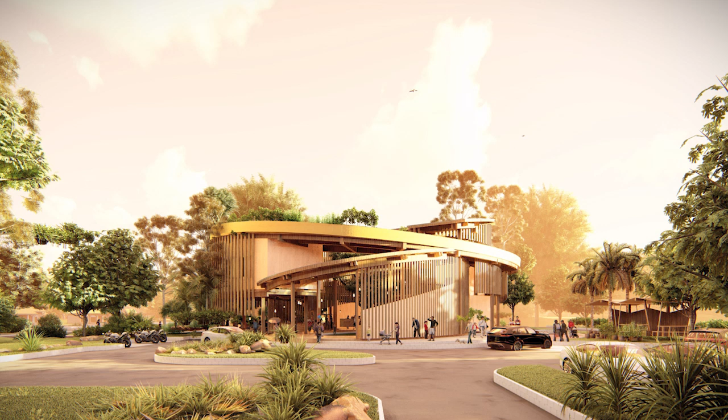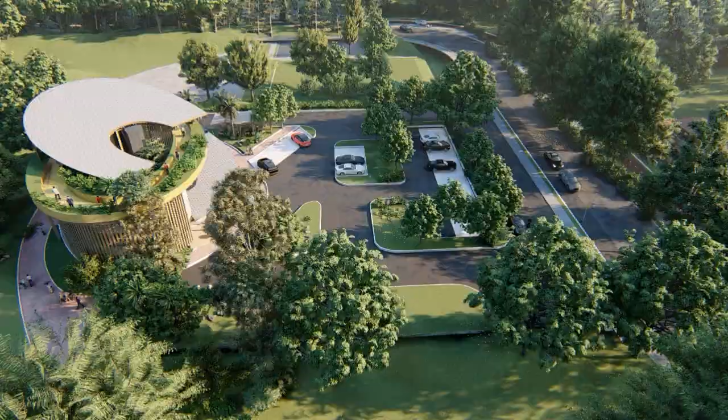Hi, I'm Wenxuan, and I'm going to start my final presentation, year 2 semester 1, with the topic of designing a food park, Loop of Hope. Loop of Hope is a food park refreshing the space with the concept of revitalization. The food park is aimed to bring in a new life and vitality to the community of Taman Pulai Jaya.

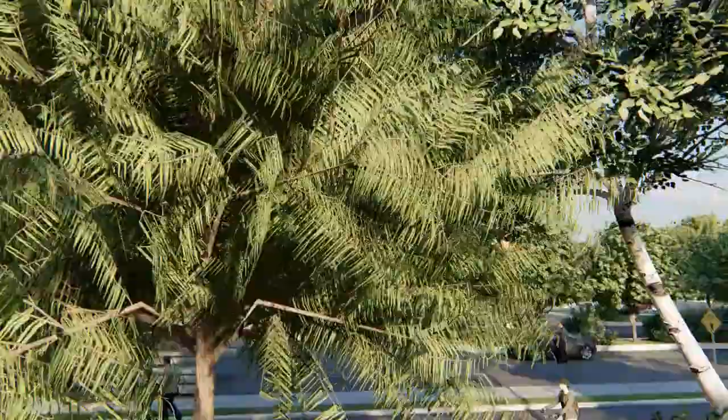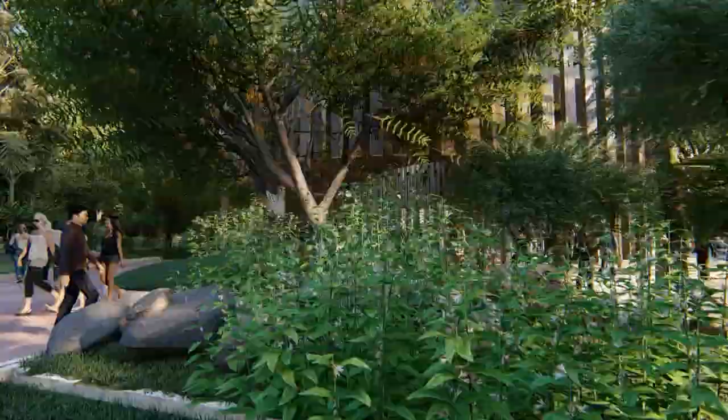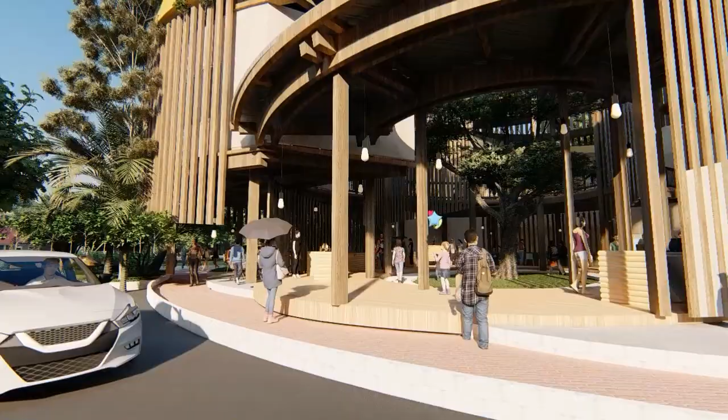We want to celebrate the essence of our cultural diversity and at the same time rethink sustainability for the future. Malaysia is indeed known around the world for its multi-ethnic cultural diversity that can be seen through our daily communication and cultural activities as well as their food. Therefore, it is essential to design a food place that not only offers varieties of food but provides diversity of social cultural activities that relate to the surrounding community activities.

In this context, street food market will be the main program in this food park, as Malaysia's streets are laden with cultural fruits, popular hawker centers, and the aromatic smells of delicious food. Malaysia, home to nasi lemak and teh tarik, has a lot of food to offer thanks to its colorful cultural background. Street food has long been a part of the country's history.

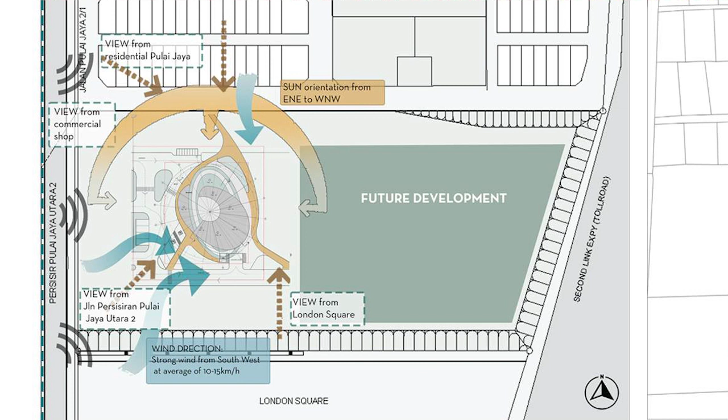It is located in Taman Pulai Jaya, which is in Bukit Pulai, a federal constituency in Johor Bahru, Johor. Our proposed site is generally a moderately developed residential area, commercial shop house, industrial and business area. Facing north is the residential area of Taman Pulai Jaya. Facing the west are the business shop houses at the residential Taman Pulai Emas, and facing the south direction is a building, London Square, which is the former show house of the residential area and will be developed soon into a business and entertainment area.

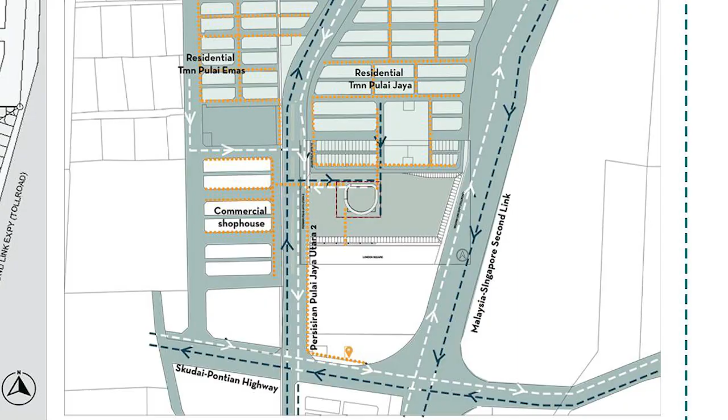Taman Pulai Jaya has a large residential area, and hence there is a need for a place for people to have social interaction. The target users will be the community of Pulai Jaya and Pulai Emas. They are Malay, Chinese and Indian, coming from all ages of society. From the site synthesis, the site is slightly corrugated and is easily reachable from the residential area, so it is highly visible from any side and direction. However, the noise from the road will be a distraction to the site, and there's a lack of entertainment and recreation area, resulting in people being less sociable due to the lack of community place.

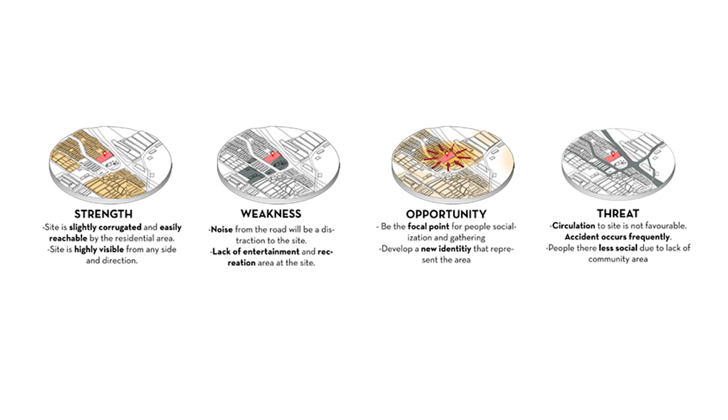Hence, this food park has a high potential to be the focal point for people's socialization and gathering. The building is oriented facing the north so that it is easily noticed by the residential area Taman Pulai Jaya. The pedestrian traffic design forms a loop coming from the residential Taman Pulai Jaya, Taman Pulai Emas and Jalan Pesisiran Pulai Jaya Utara 2. The hierarchy of the building volume also responds to the engagement of the building program and its accessibility. Some sustainable approaches are considered in the design too, such as passive ventilation and the implementation of the green roof.

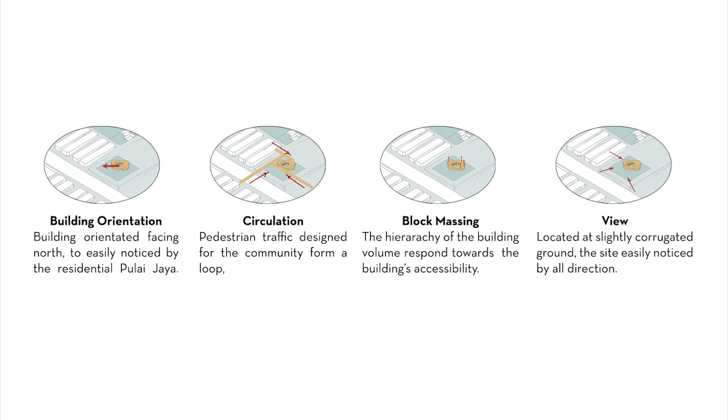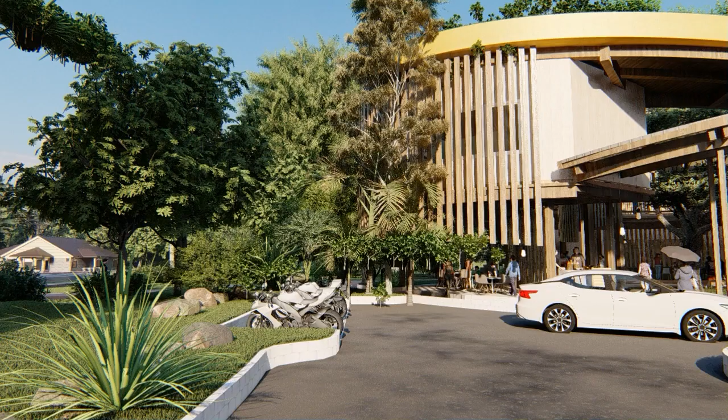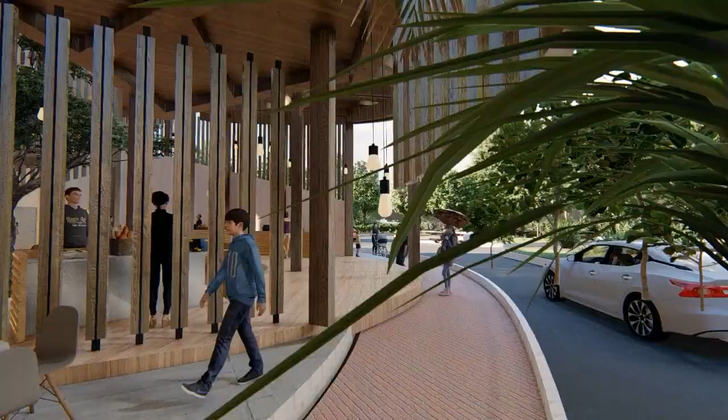My design concept is a loop, linking all the communities nearby and connecting people in all directions. The loop also brings a metaphor of the endless liveliness of the community, continuing to carry the multiculturalism of people for a long time to come. My design intention was to revitalize a food park to impart new life, new energy, and our multiculturalism in our community. The idea of a walkable city offers a pedestrian-friendly environment for people to socialize and interact with each other. As a utopia where people live, work, and socialize in a community, this place is creating a vibrant and lively ambience in the neighborhood.

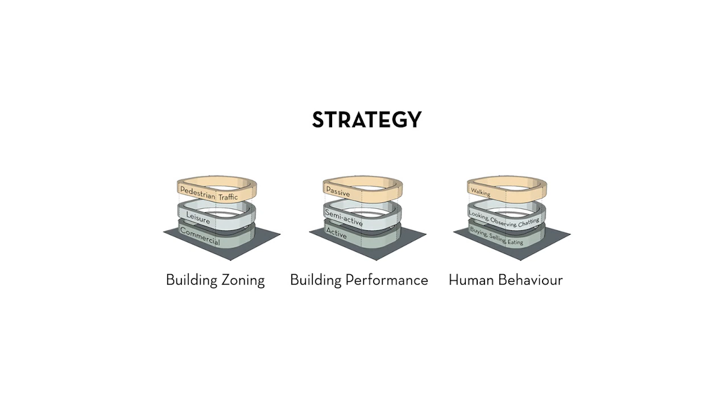The design strategies are based on the building zoning, building performance, and some studies of human behavior. Firstly, the zoning is divided into three main parts, which are the commercial, leisure, and pedestrian traffic. From the ground floor, there will be an active circulation, followed by a semi-active one at the first floor and a passive circulation at the walkable green roof. At the ground floor, most of the commercial activities take place, such as buying, selling, and eating, while the upper floor will have some space for people to enjoy leisure time, such as relaxing, observing, and chatting. The green roof promotes walking and enjoying the nature view of the surroundings.

And next, I'm going to share with you the massing diagram of the design. The building form starts from an abstract geometry, which is defined as a circle in site. It then forms a loop shape that enhances the connectivity in the community. The circles are rotated 30 degrees and interlock with each other. There's a pocket garden and internal courtyard that shows a great fusion of culture and nature. The food market is located at a big open space which can be subdivided in different ways. The food park is also a lively and vivid place to interact, having a sustainable walkable green roof with exposed timber structure in the atrium of the building.

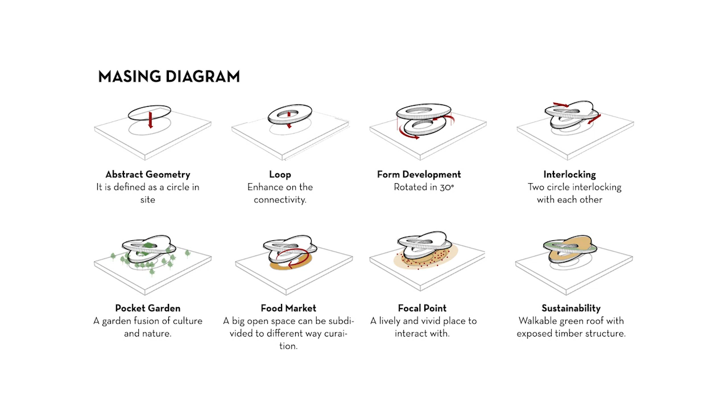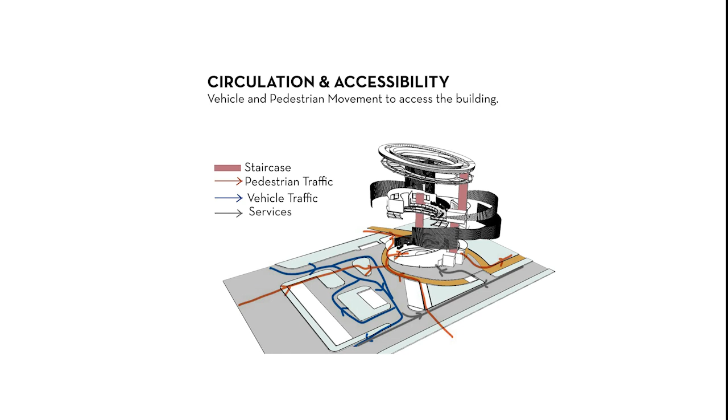Seeing from the site plan, the building focuses more on the pedestrian pathway, and you can see that the vehicle traffic has clear boundaries to the pedestrian pathway. The blue color indicates the vehicle traffic, the grey are the service lane, and the orange color indicates the pedestrian traffic. It is clearly shown that the building can be accessed from all directions: the north from residential Taman Pulai Jaya, west from Pulai Emas, and south coming from Jalan Pesisiran Utara 2.

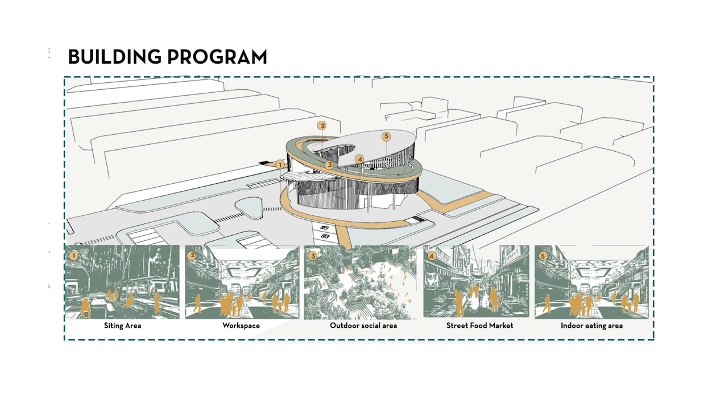The building program is mainly about the street food market at the ground floor, indoor and outdoor dining area, a mini art market, sitting and lounge area at the upper floor, a small workspace, and a walkable green roof. Bubble diagrams below show how all the public spaces like street market, eating area, and workspace are located in the frontage of the building, while the semi-public and private areas are located in the backside of the building.

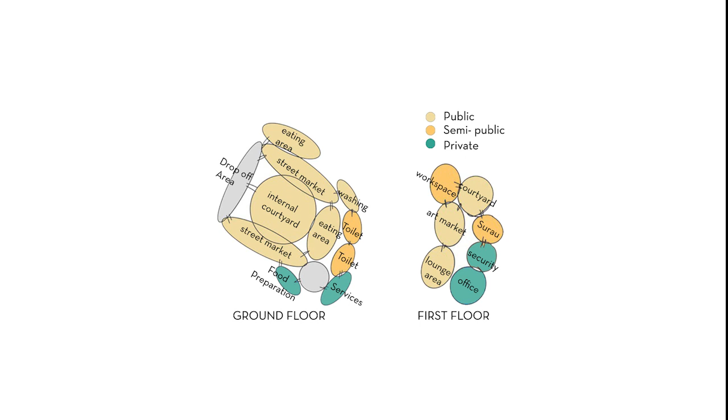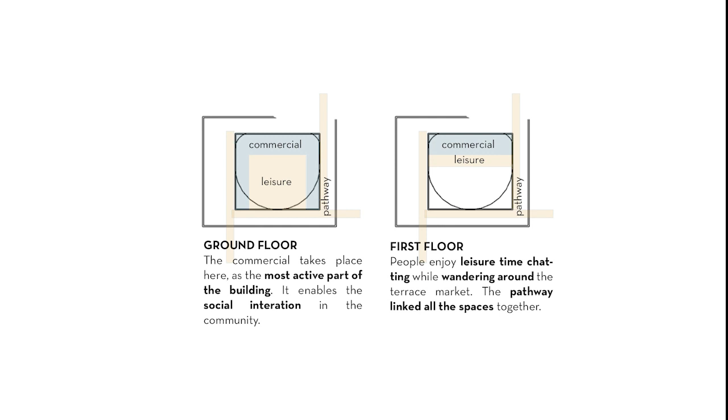The site zoning integrates well with the accessibility of the building. For example, at the ground floor, the commercial takes place here as the most active part of the building and it enables social interaction in the community. For the first floor, people enjoy leisure time chatting and relaxing while wandering around the art market and the lounge area. At the ground floor, when it comes to the drop-off area, people will directly meet at the atrium, which is the internal courtyard located in the middle of the building.

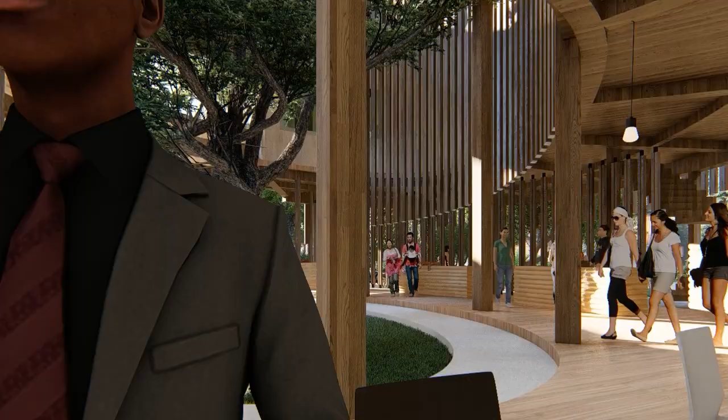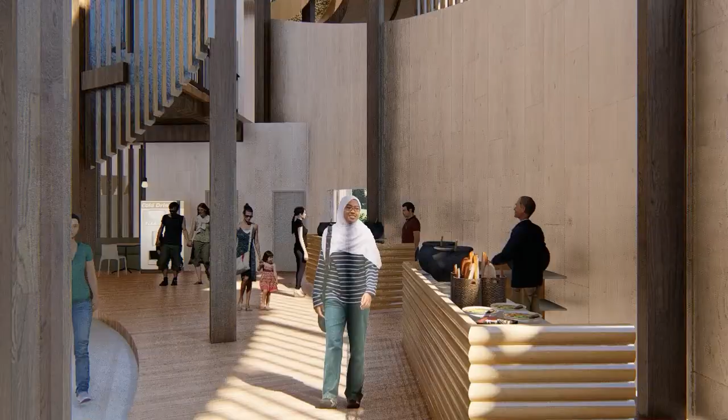Surrounding the atrium are the 7 street food market stalls. At the left side are those food stalls selling street food, while at the right-hand side are those heavy food areas that need handling of cooking. Leading all the way to the end of the street market will be an indoor dining area, while there's also an outdoor eating area provided near the main entrance of the building. Behind the eating area will be the private and services area, like toilet and unloading bay, and there's also a service entrance coming from the back of the building.

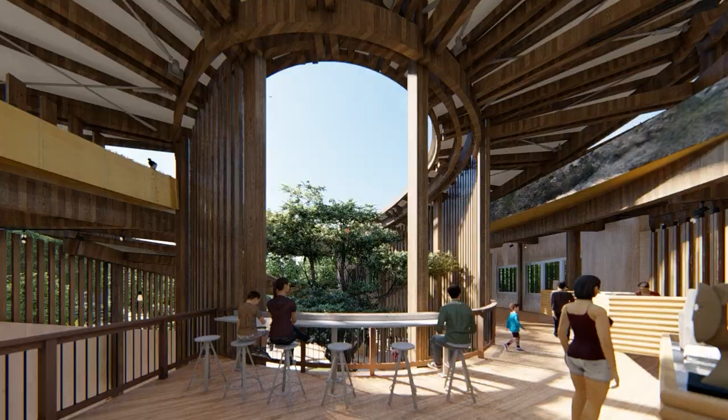Coming up to the first floor, it is a sitting and lounge area that enables people to enjoy the ambience and vibe of the food market in the middle of the void, which is also the internal courtyard. Along the way to the workspace, there are some vendor art market stores to visit, and as in the same layout of the ground floor, behind the timber cladding, we will have some private space such as office, security room, Surau, and a mini courtyard. Besides the main staircase, there is also a steel timber staircase that leads to the upper walkable roof.

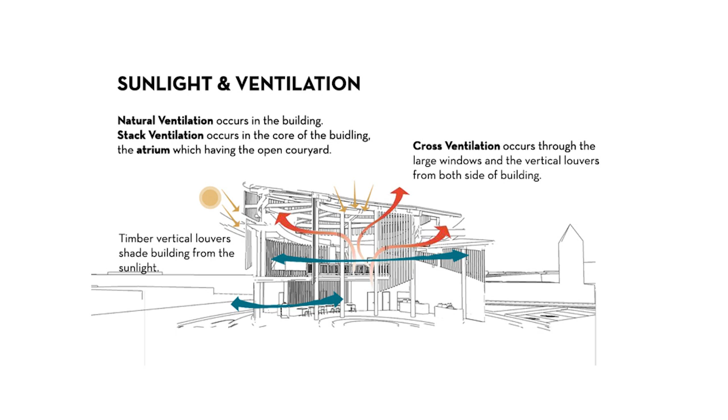About the sustainability of the building, passive design is implemented to optimize spatial planning and orientation to control solar gains and maximize daylighting, manipulating the building form and fabric to facilitate natural ventilation strategies and making effective use of thermal mass to help reduce peak internal temperatures. There are natural sunlight and ventilation provided in the building. For example, stack ventilation occurs in the core of the building, the atrium with the open courtyard. Cross ventilation occurs through the large windows and the vertical louvers from both sides of the building. The timber vertical louvers shade the building from the sunlight as well.

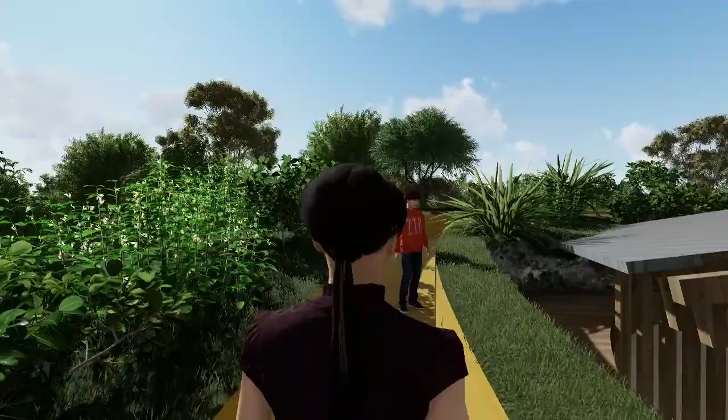For the sustainable walkable green roof, a maximum of green roof is adopted and helps to improve air quality. People can enjoy the natural view of the surroundings as well. A green roof provides a rainwater buffer, purifies the air, reduces the ambient temperature, regulates the indoor temperature, saves energy, and encourages biodiversity in the city.

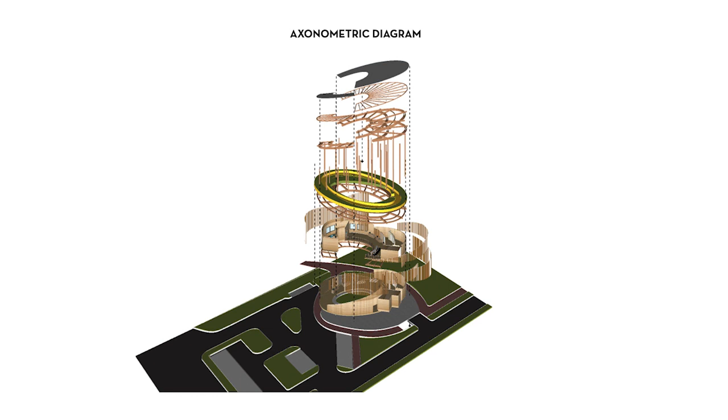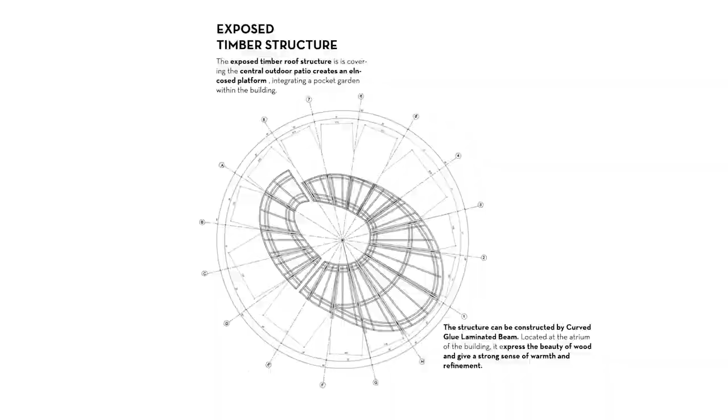As for the building construction, the application of new construction tectonics in the fusion between glulam timber construction and conventional timber construction has become the strategy of this project. The hyperbolic form of the roof is generated through algorithmic geometry and can be constructed through glue-laminated curved beams with concealed beam hanger connections. The exposed timber roof structure covers the central outdoor patio, creating an enclosed platform and integrating a pocket garden within the building. It expresses the beauty of wood and gives a strong sense of warmth and refinement to the building itself. A straight grain single slope curved roof was adopted as it could drain water effectively.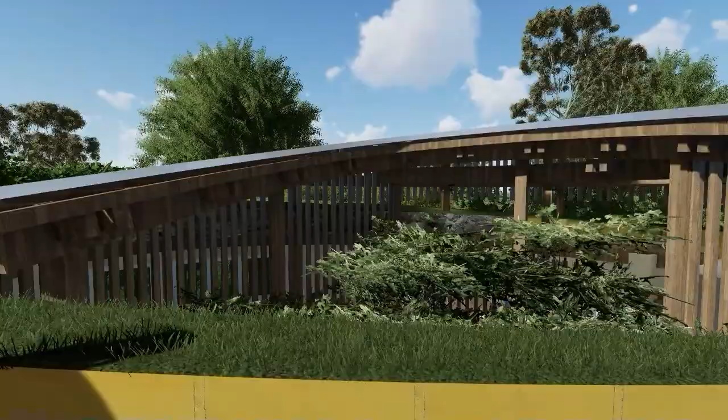A simple grey metal sheet roofing was used as the roof material. Metal roof reflects the sun's UV and infrared rays that contribute to roof surface radiant heat, which can result in reduced cooling costs. Besides, timber cladding is attached to the wall as a sun shading device. The floor finishes are constructed by adopting timber flooring construction. Exposed timber ceiling beams in warm toned wood give the space a cozy and inviting feel. It also draws the eye out and adds character to the building. Also, the timber posts are framed to the concrete ground.

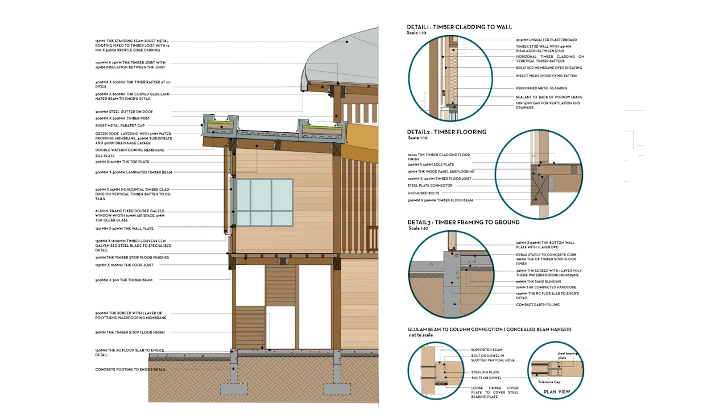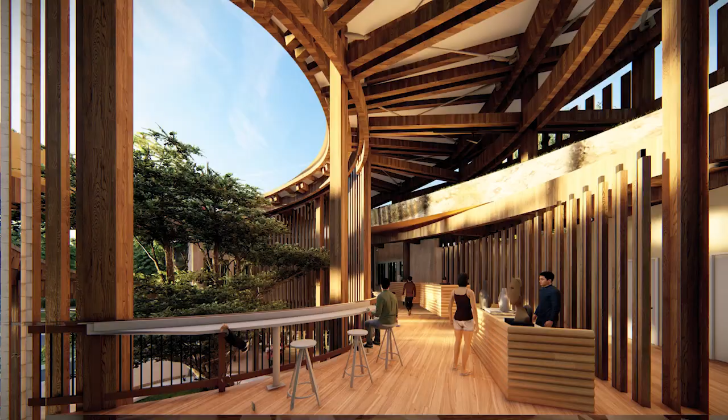Besides being a food park, this Loop of Hope at the same time acts as a community place for people's social interaction. Emerging from nature and at the same time blending into nature, the food park is intertwined with nature in the most subtle way, existing co-dependently. A semi-enclosed courtyard typology was adopted, and the overlay site was defined as the outer boundary of the food park, while retaining the functionality of the interior spaces and trying to maximize the open public space as much as possible. The building emphasized the openness of indoor and outdoor, integrating with nature at the same time. The floating corridor became a continuous yet fluid element that held the space together.

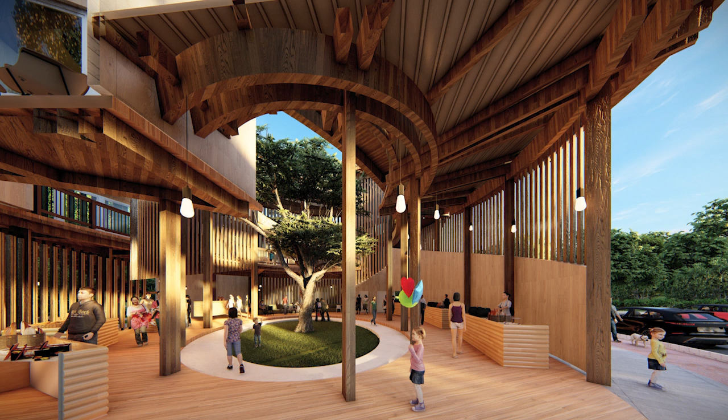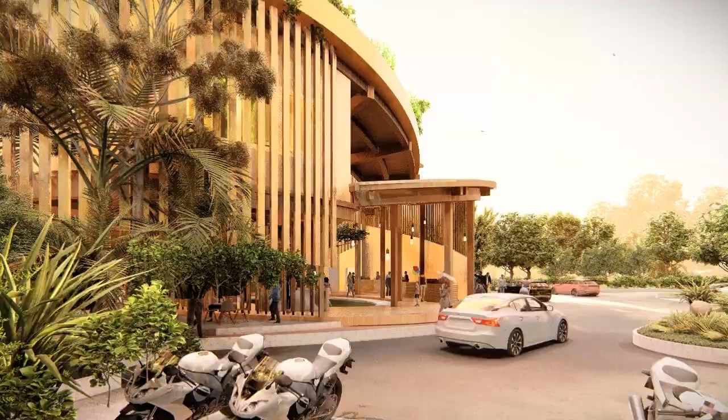To accommodate the low height difference of the entrance, the roof was lowered at the entrance, forming a hierarchy from an open street market to a private workspace area. Our respect toward the local culture was the foundation of this architecture design, and I took the timber constructions into full consideration. What I am working towards was to revitalize the area, celebrating the essence of our multicultural yet unique street food market culture of Malaysia. Loop of Hope is aimed to reshape the social culture of the community in Pulai Jaya, building up the liveliness in the community. So that's all for my presentation.